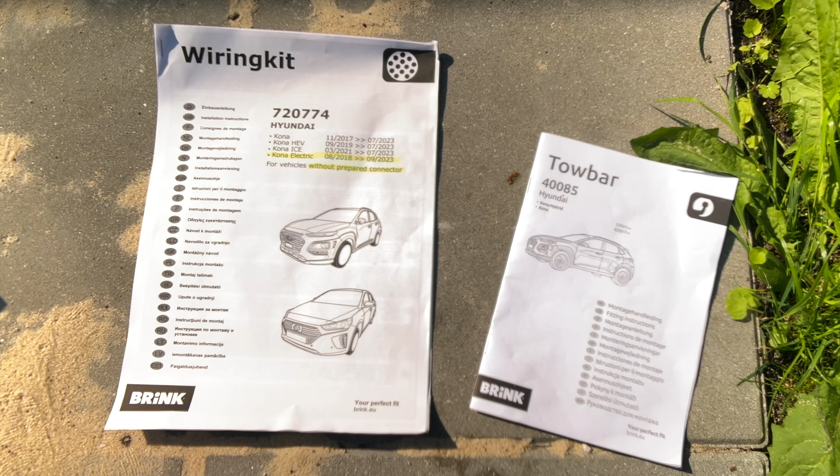In this video I'm going to show you how to install a tow bar and wiring kit on a Hyundai Kona. Okay, so we have to remove the rear bumper.

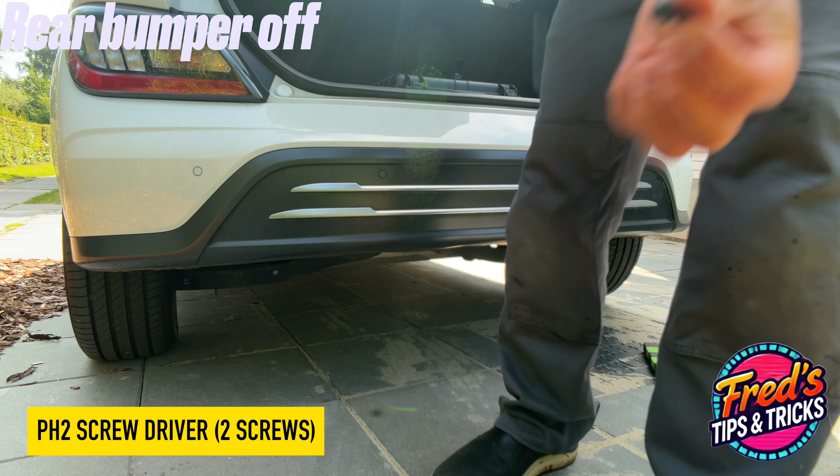Self-tapping screw, all of these in this one so I can keep track of all the bolts. So that should be 4 here, one up there. So just removing all of these 4.

So this is actually so tight that you can't really do it. Yeah, just barely did it.

So, and there should be 4 on the other side as well. These clips, this one here, and similar on the other side. I have one of these.

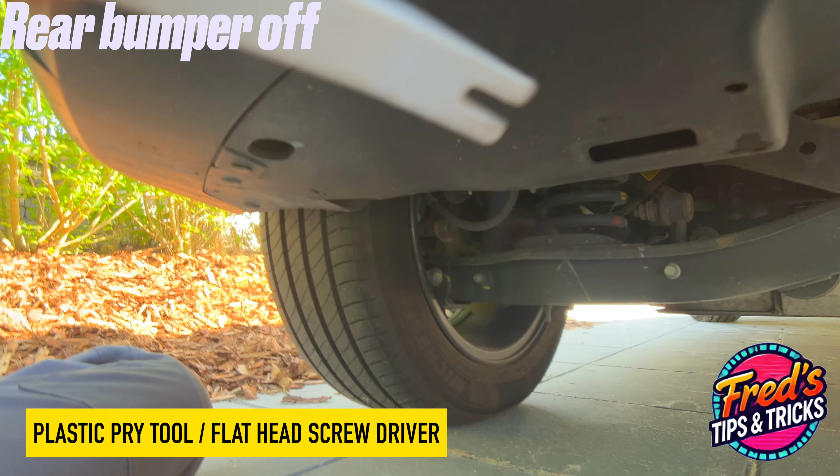You can just use a screwdriver, but when I'm using this one, I think it's more gentle. So, putting it in between the 2 plastics. Not above both, but like this, pushing in, and then taking it like this. Loosened.

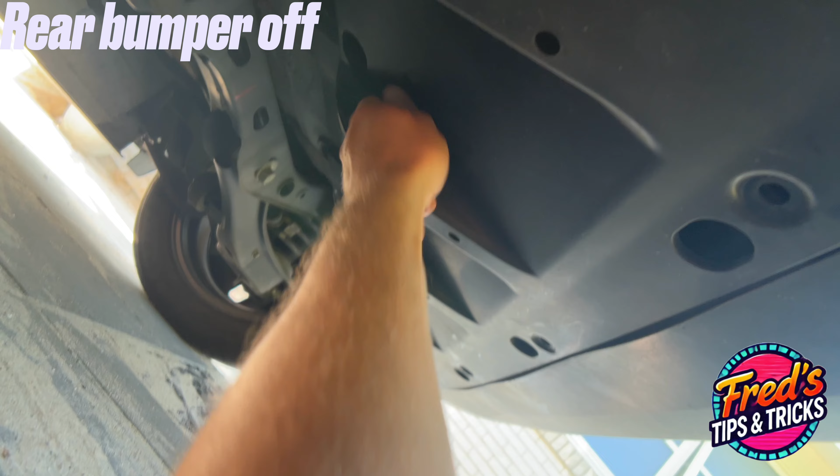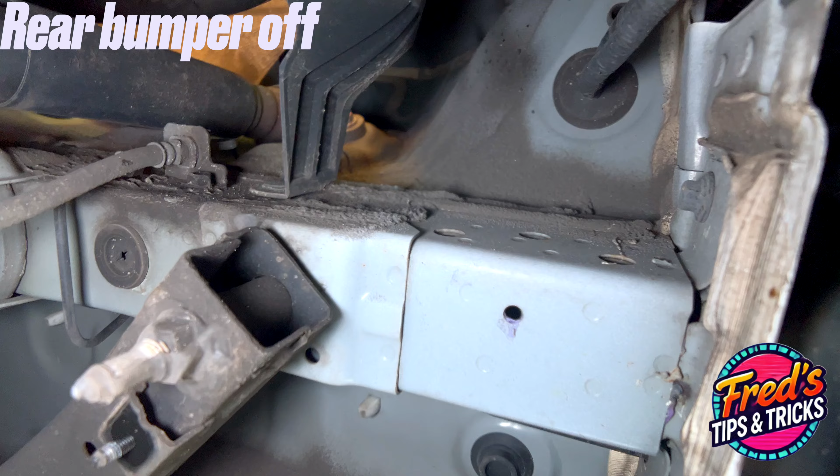That was 4 nuts, 10mm, and 2 down there. But you have to remove these 2 Phillips screws. Then you had a lot of clips, where I showed you, and now I have access to these 3 points, the ones you have to connect to these plates for the tow bar.

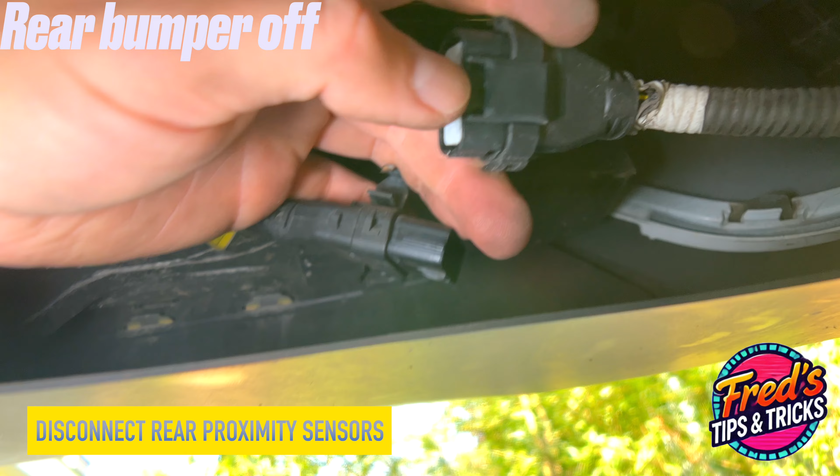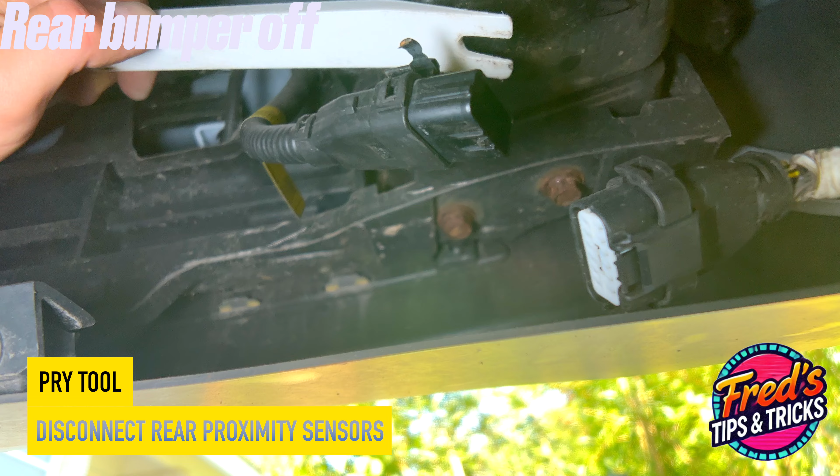This one here we have to remove. I started clicking this one in here with my fingernail, and then I could take this away from this, and this was sitting in here. Putting it in here and then just gently doing like this while wiggling. So take this one off, and same on the other side.

Yeah, like that. Nice. Okay, so I pushed down in this direction while pulling. That's so cool. So now that's loose.

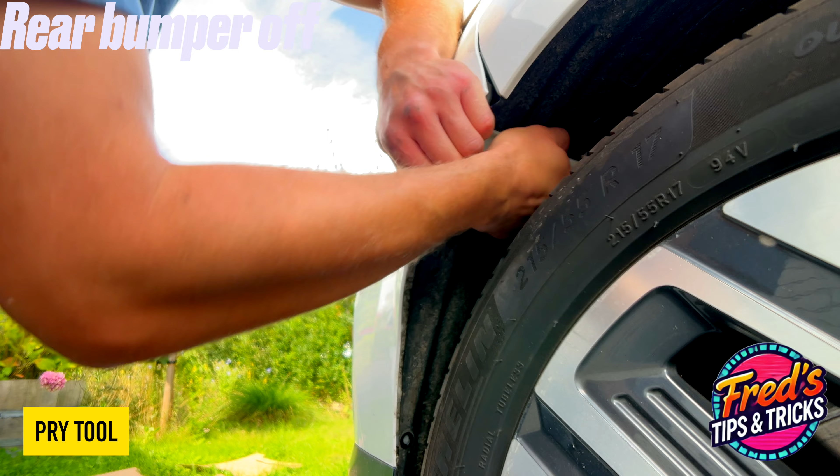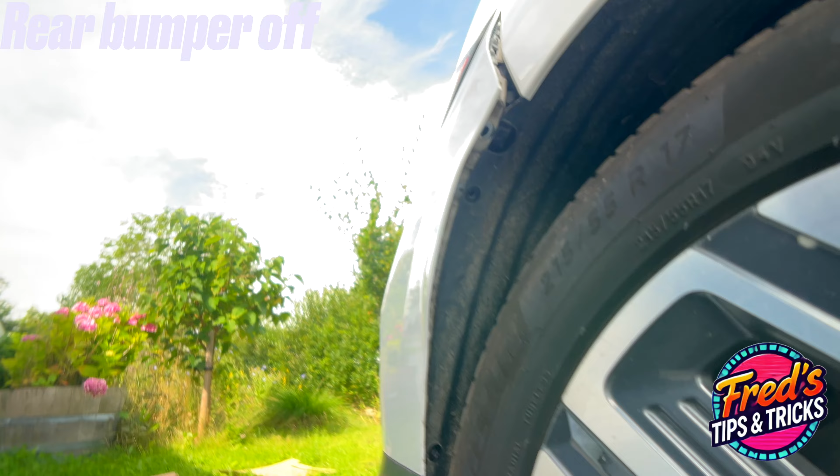Have to pull quite hard, but yeah, that's how you do it. Nothing broke and stuff like that. So nice. And now it should be coming off, I think. I'm having something down here - if I drop it, just wiggle it like this.

Yeah, now it's loose on this side. I'm just wiggling while pulling back on the car and the panels here and lifting. I have to pull this direction up here. That was the sound I wanted. It's loosening now, I'm just trying.

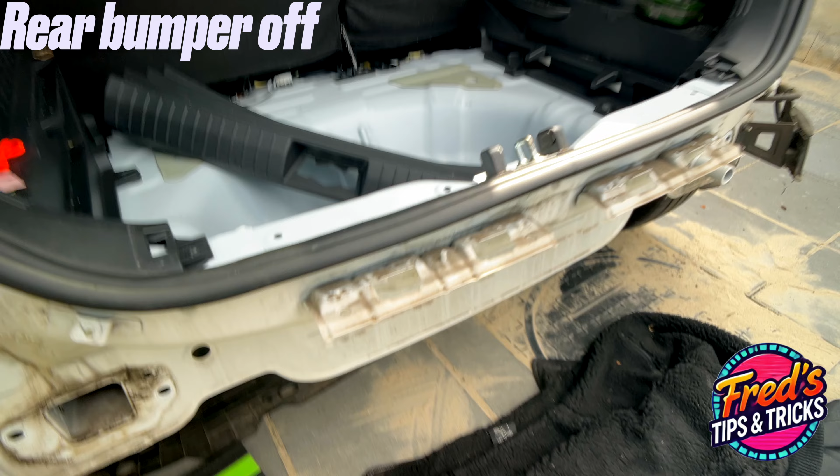Oh, and it all went off. That's so awesome, I got it. It was these 4 that I had to pull out.

That's 2 plates. This kind should be the same, I think. It looks like it's the same. These have to be torqued at 75 Newton meters.

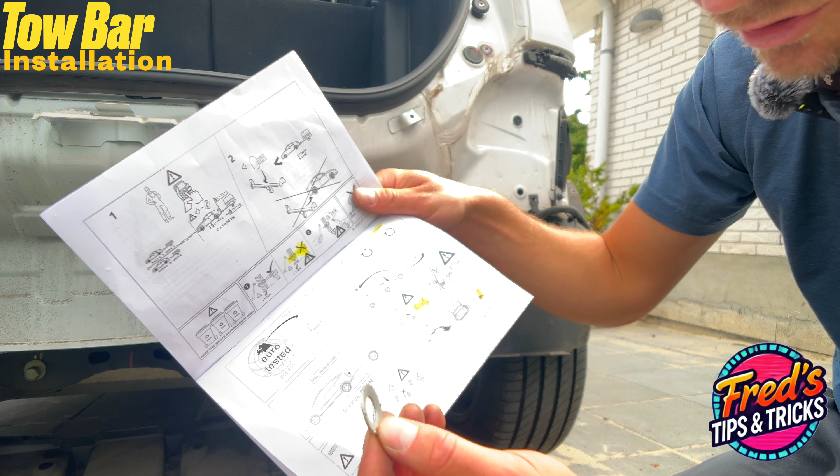So I'm putting it up here like this, and there. Then I'm doing like this, there, and then bolts through here. These ones should be away from the bolts, with these points here, making sense going into the chassis and locking itself. So that's what I'm doing, and I'll prepare them all so I don't forget one.

I'm taking the outer one, just checking if it says like right side, left side. It doesn't. So putting this through, and I know it's the first hole - it's through, and I'm taking this hole because it's the easiest for me to control.

I'm not going all the way in because I have to get the other ones. Remember the spacer - remember not to drop it. Perfect. And not hand tightening it all the way. Now it should be placed right. Yeah, that's perfect.

And I'm waiting with the torque wrench because I just have to see - sometimes I do something wrong and then I have to do it all over again, so I'm just waiting, making it wiggle like that.

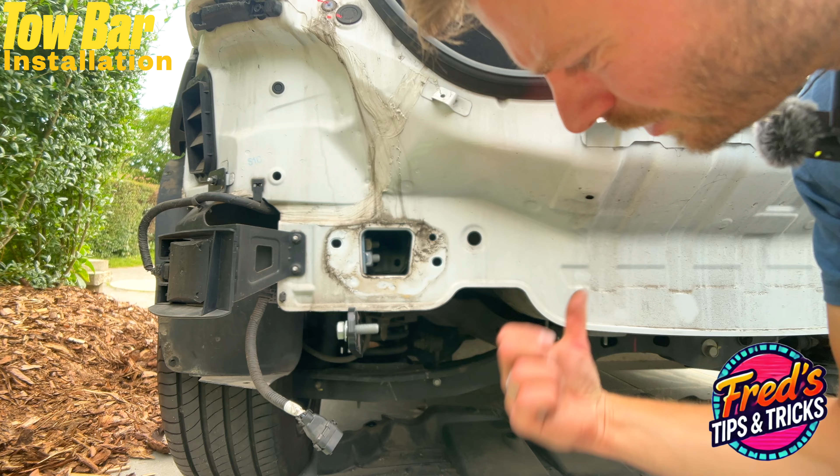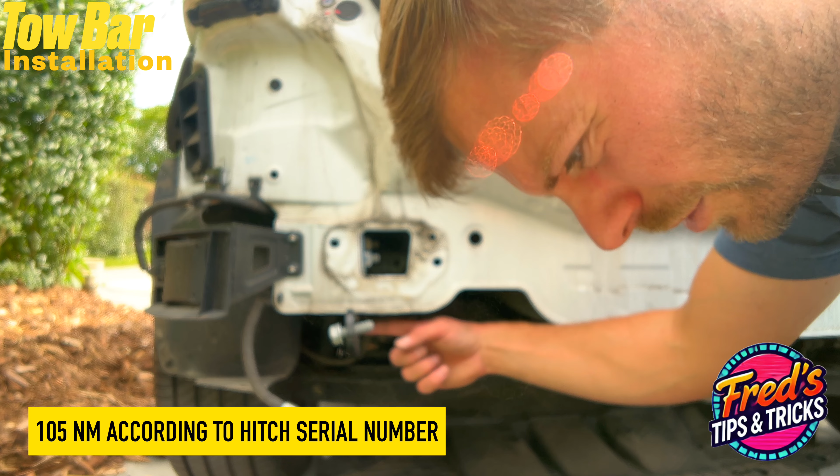They have to have it this way in, and actually without a spacer, this one. And they should have 105 Newton meters of torque, this one, and the complementary one over there, and also these ones - they should also have Newton meters, so be aware of that. And you have to torque it up again after 1,000 kilometers of driving.

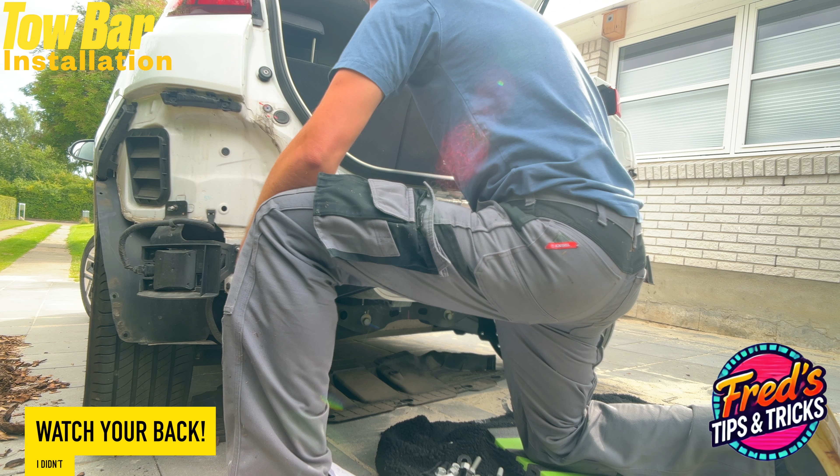I'm just gonna turn it around like this. That was very bad for my back, I could feel, but I have to do it like that. So cool, just checking. Just goes down, and yeah, I know it.

19 maybe? Exactly, okay. Just not going all the way. Nice.

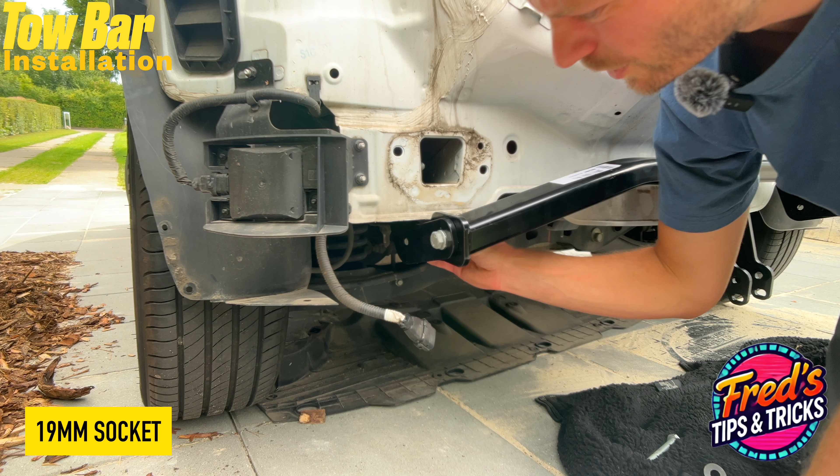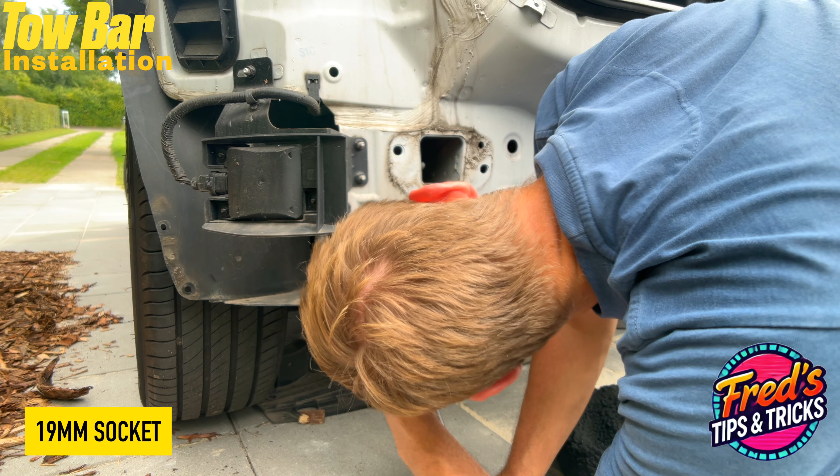And in here, and then just with a nut. I'm just trying out if I can get up here. Yeah, I can, that's awesome. Okay, from the inside and out. Okay, cool.

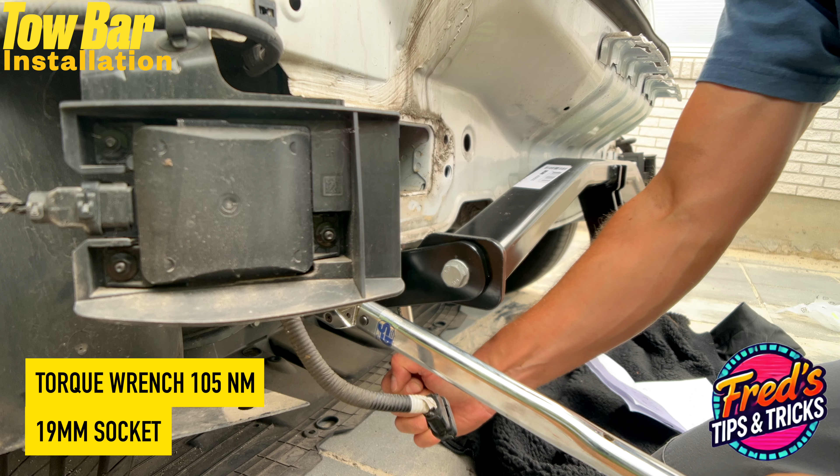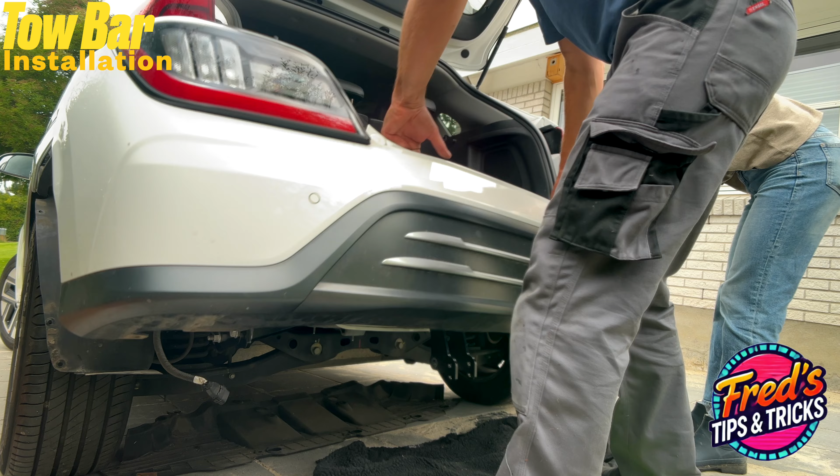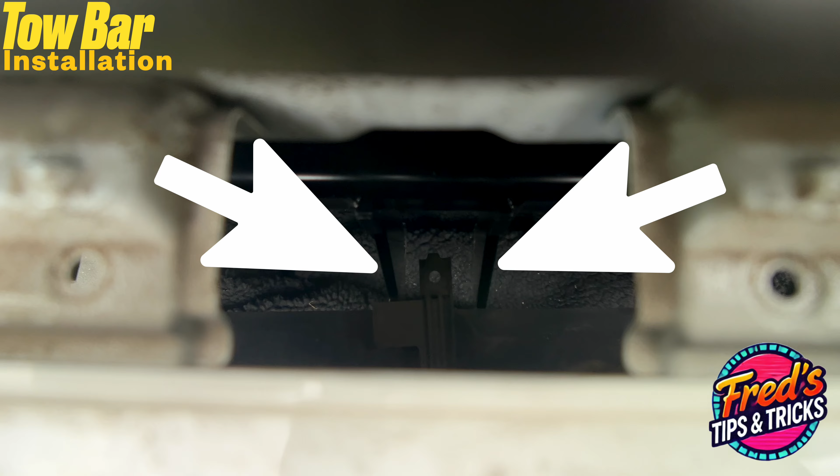So what I did here was use two black ones as the hitch, and you obviously have to cut it to get it all the way in. So that's why I aligned it here, to just be able to see where I should cut it. I'm trying to do that now with just a normal knife. I just removed this, and when I bought the car and the hitch, he gave me one of these, like a sketch for how much to cut. So I just tried to mimic that, and now I'm just using the knife.

Generally, when you're cutting towards yourself, that's a bad idea. Here I had a very short blade, and I used a lot of force, pushing into the plastic so it wouldn't slip as easily, and I was tensioning up my arm, so when it slips, it does that in a second - you can see it doesn't go that far.

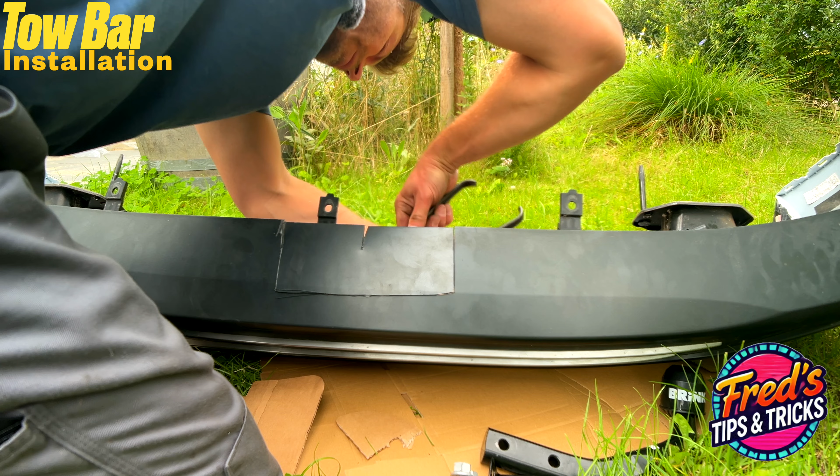Nice, yes. And it says up here they cut it, and they did a lot of these things because they only sold used Hyundai Konas, so I'm trusting this.

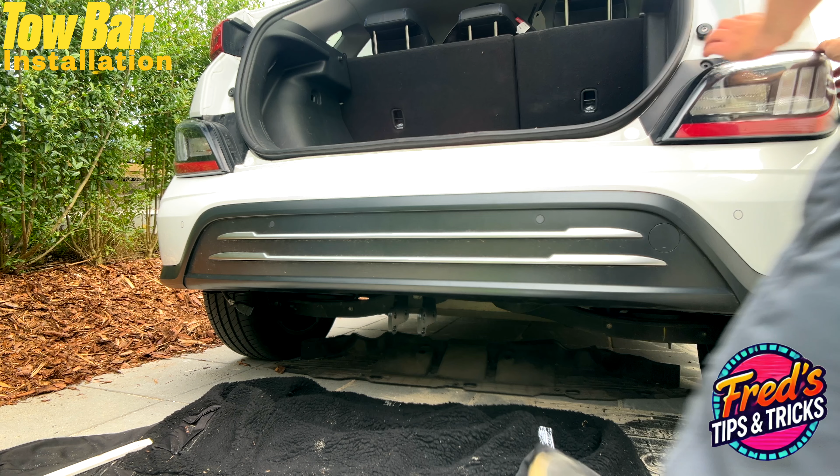And you can see here, I just have my lovely assistant helping me with getting this on. And now it looks like this.

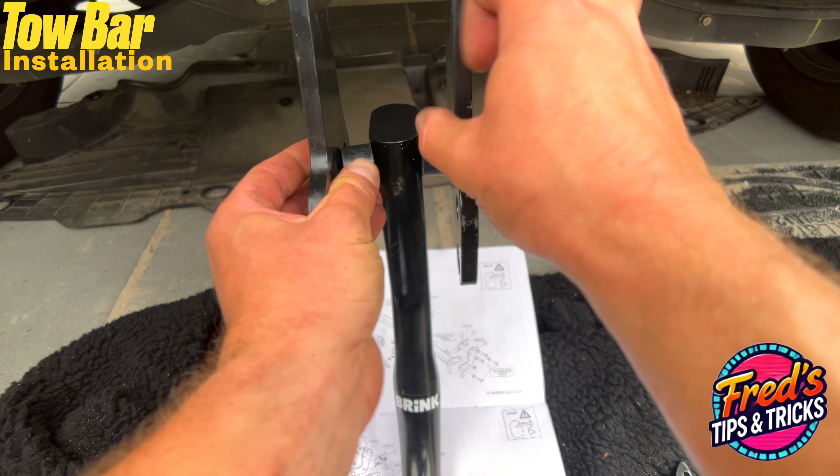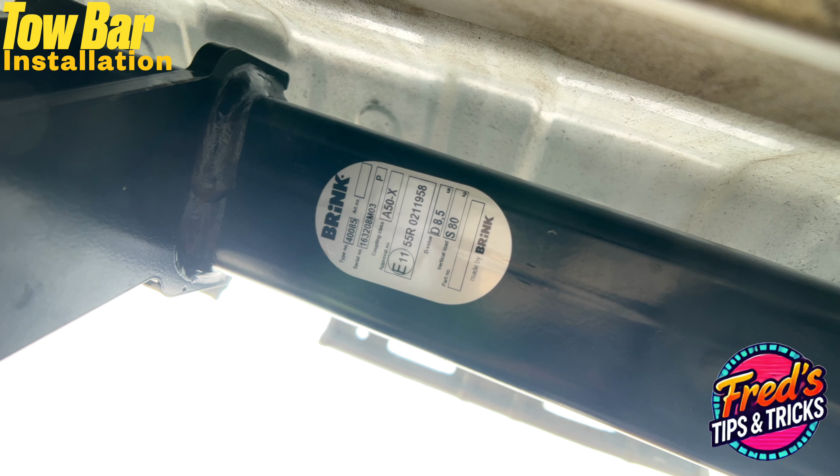The serial number is right below here. Mine ends with a P, and that's only 105 Newton meters of torque. I'm just gonna torque this at 105 now.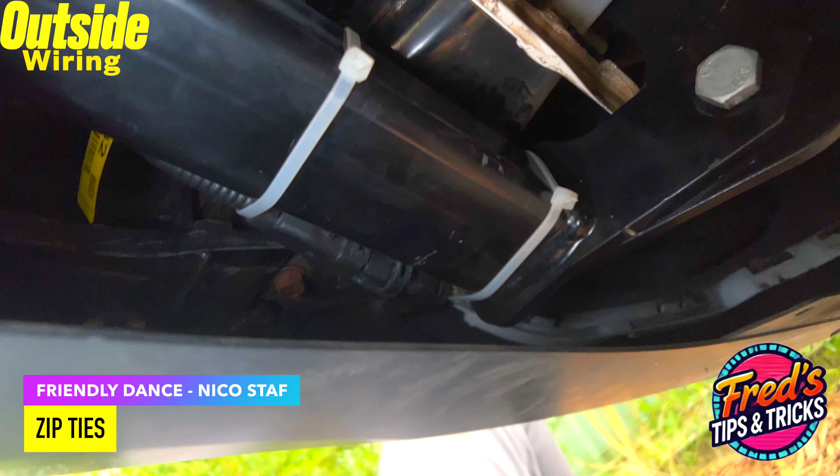The connectors I had to reinstall with cable ties because the space is occupied by the beam now - this beam. So yeah, that's just how I fitted it.

So reconnect it first and then fit it. Cool, there you go - the other one.

Can you see it? The great thing with these plastic things is that they don't scratch as much.

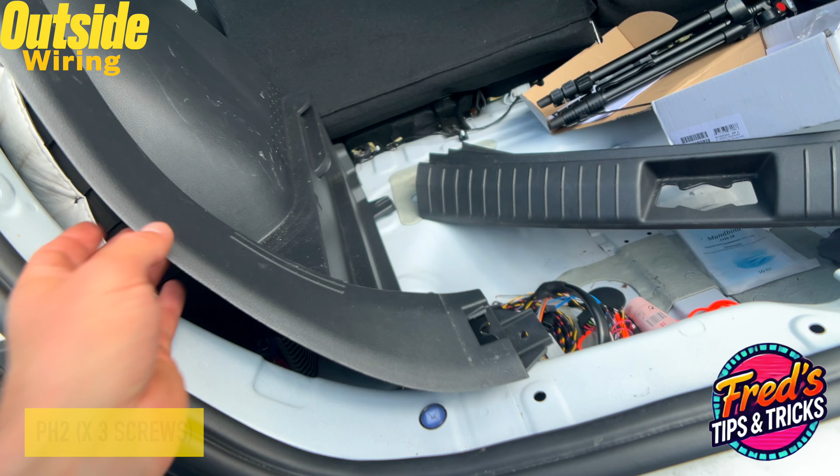Four clips, 1, 2, 3, 4, and these 2 clips as well. So I have to remove this one. 3 screws, and you just take it out.

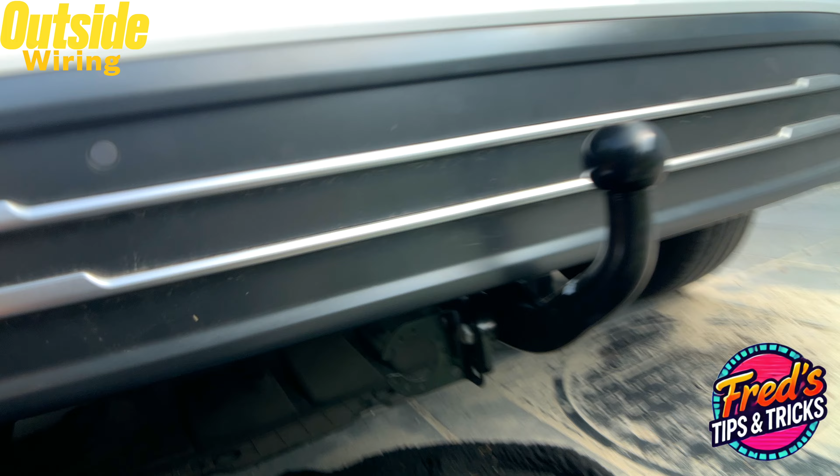Then right here you have this rubber ring seal. You have to get the cable down there from upstairs, from the top, and then there's enough wiring for you to work on, and then you have to mount it.

There's numbers on the connector itself that has to correspond to the colors on this particular wiring kit - to a blue and black.

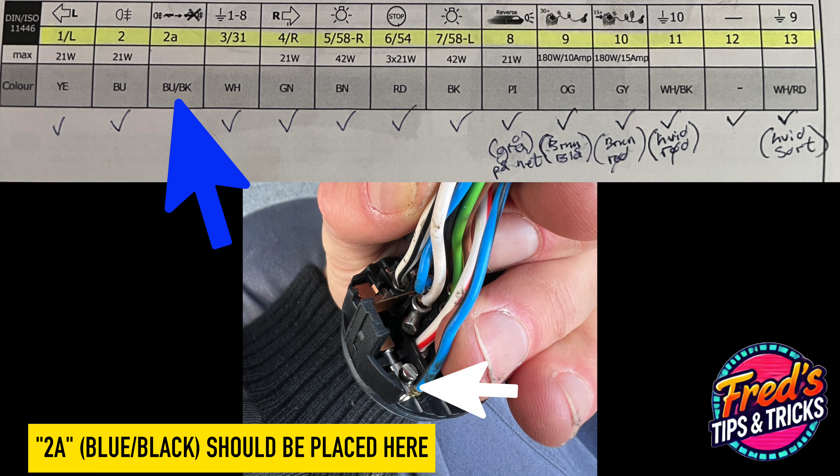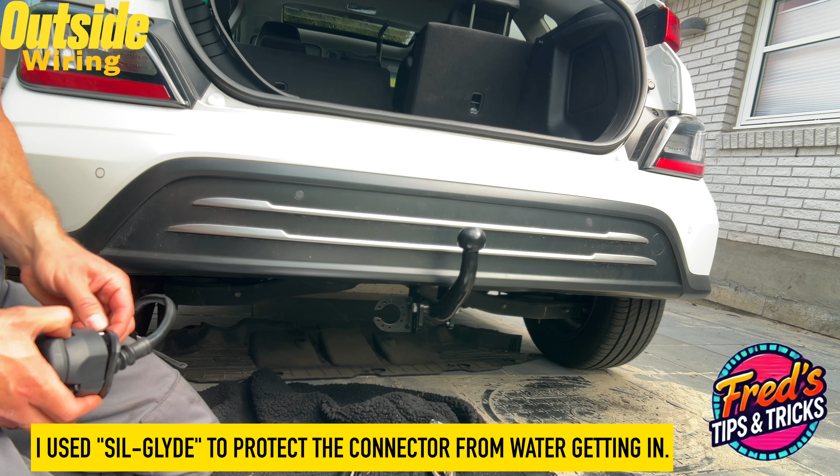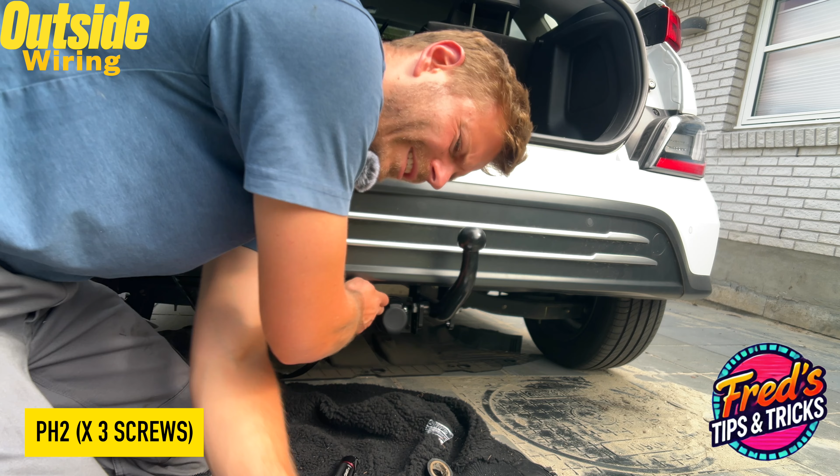Now I have a lot of spare, but I'm going to zip tie it up on the beam. It goes from back here up on the beam. Zip tie, zip tie, zip tie.

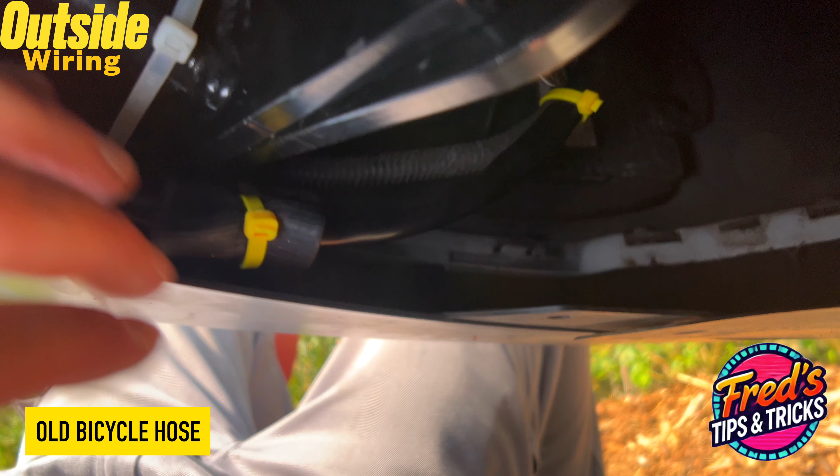And because I can't really zip tie it here, I've done something so it won't rub against this, because over a lot of kilometers, this is gonna tear and wear on your cable. On it up there and up there.

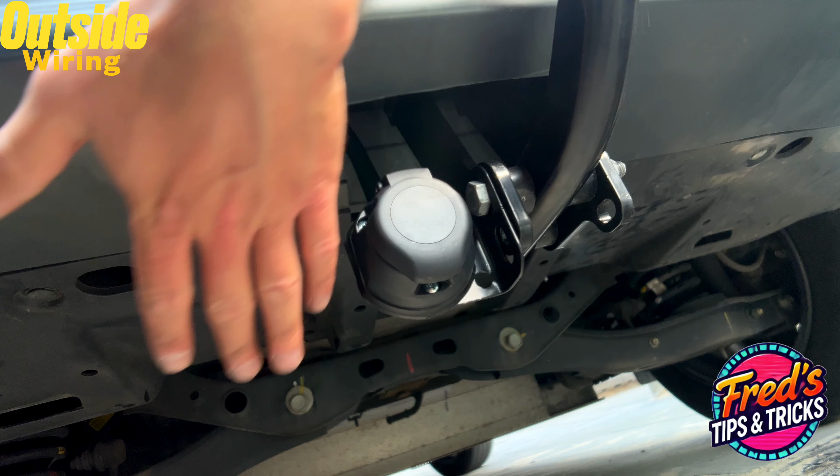When we install this plating, you also have to cut this to make it fit, but it's quite easy. Put some silicone here to seal it off, as it says in the manual.

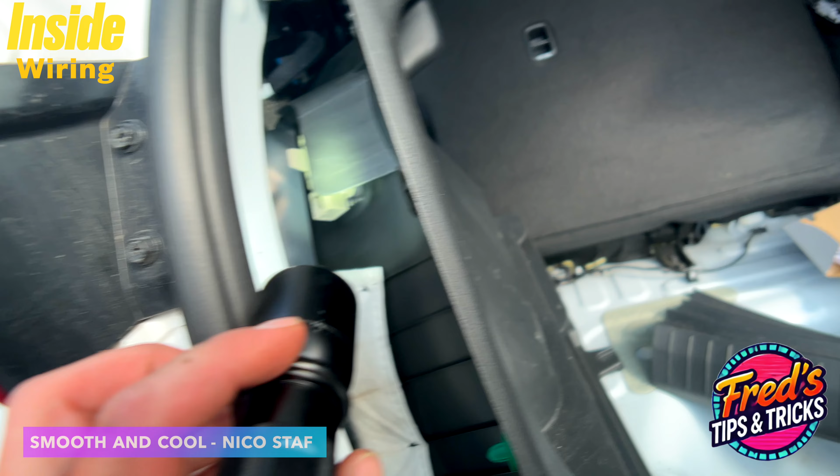And I just took, by the way, this connector off for the lighting. It's right down there, so I could get this further out. Down there you can barely see where the wiring is exposed.

I took it way too far down, so remove some of the tape that it says and do it in the middle like this instead. I'm just gonna give it some electrical tape to isolate it from the other wiring. I just put on the ignition.

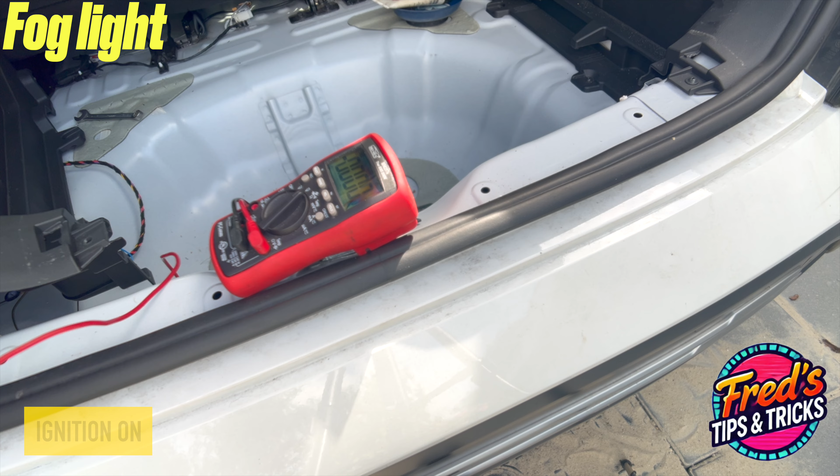Now I'm taking this one down in the small groove. Remember to have your ground. There's no fog light on now, so 0 volts.

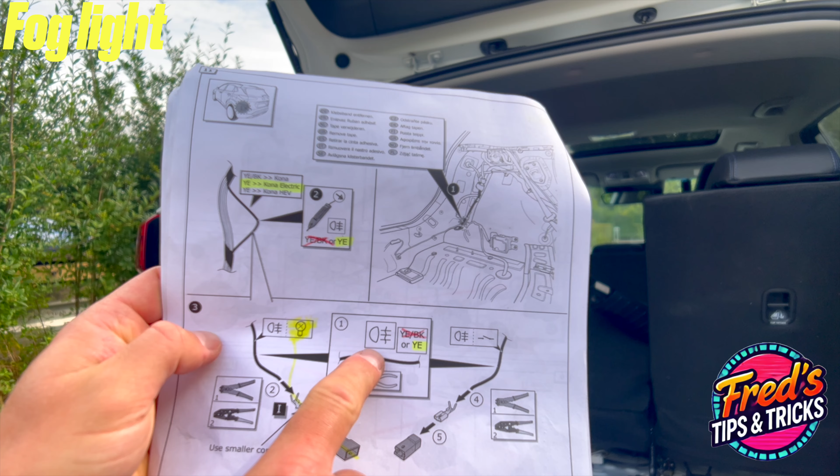Now I'm just gonna go in and turn it on. Here we have 12 volts. Turn off the ignition - we're cutting it here to put on the connectors. This is the fog light symbol, obviously.

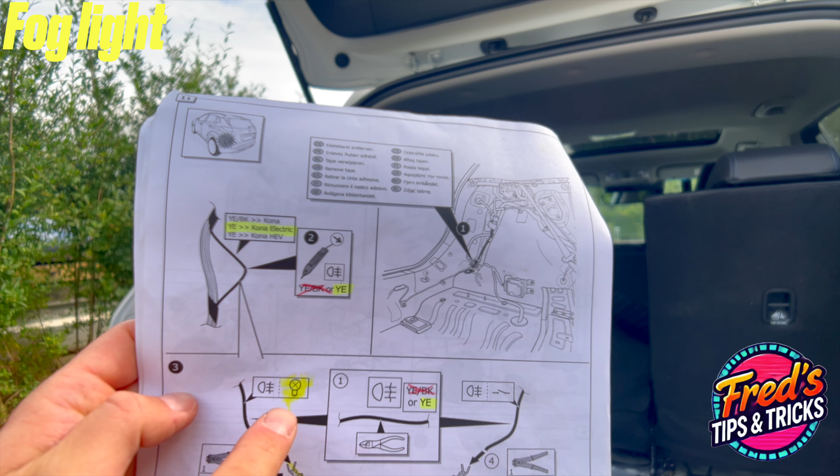We have the yellow one, which is the one I just cut and measured on. This is the light bulb, and this is the switch for the light bulb. So you should think of this as being the light bulb itself.

This one, so that has to have a male connector with the big connector, and the other side should have a female connector with the smaller connector.

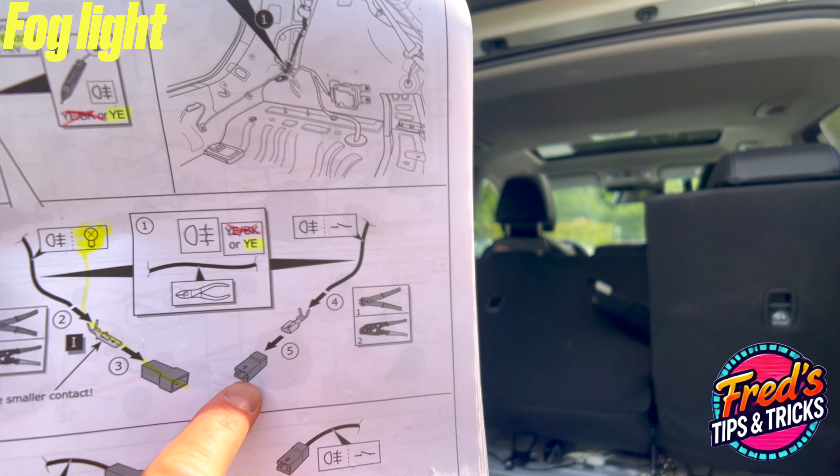This is very important. The reason they are saying use smaller contact is that you have 2 contacts here. One of them is bigger - this one is bigger. This is for 2 wires that are going to the fuse box.

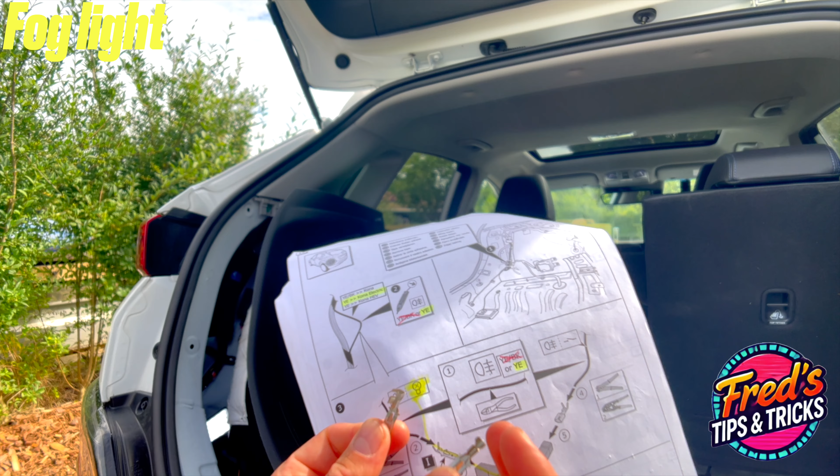This one you want to use. This is for a single wire. So keep that in mind to use here.

And at first you're gonna uninsulate the wiring. I had to take the whole bundle out. I used my pry tool here to just go in between the clip that holds it, like down here, and then just force it out.

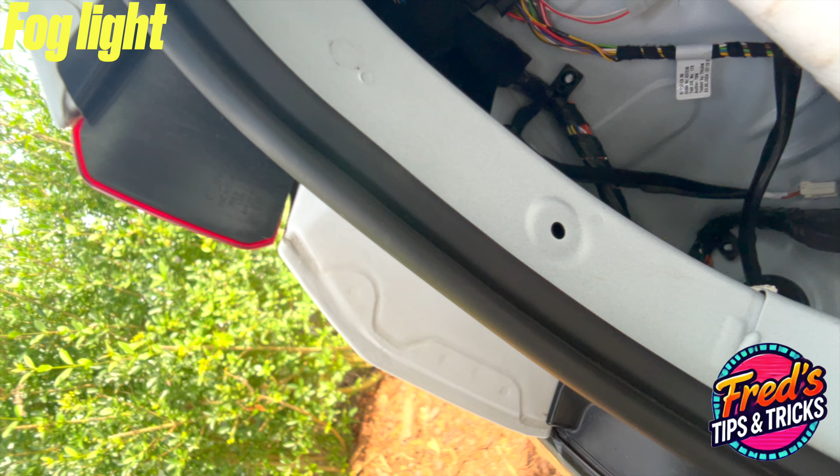I needed that because my crimping tool, my isolation, is all the way down here. Be aware not to cut anything else with this end when you're unisolating. I had to use the 0.75.

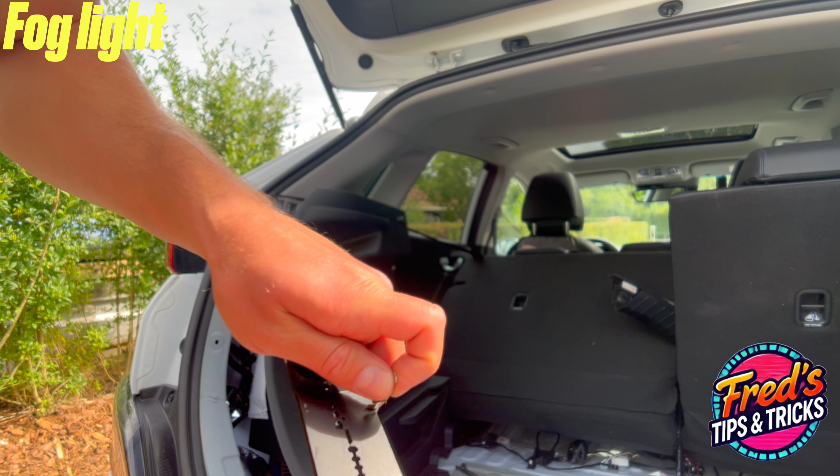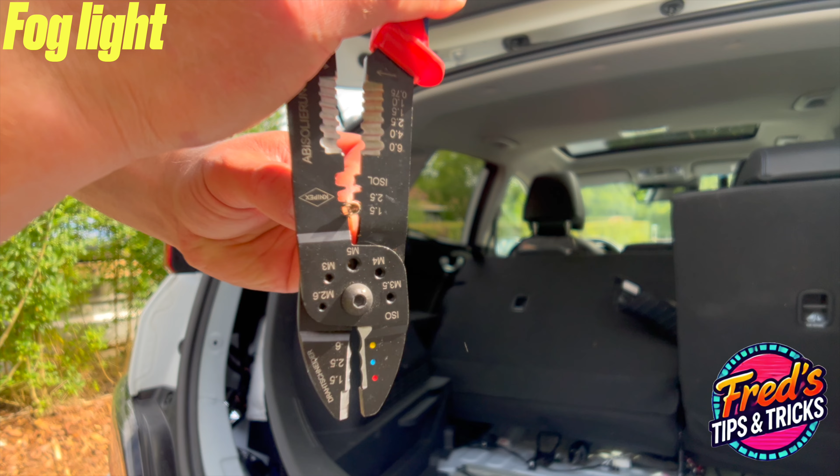Put this right here like this, so it gets the isolating to touch and the other one around it like that. When you're crimping it, there's 2 sizes, a big one and a small one. You need the big one for that, and the small one around the wiring, so you get it nice and tight.

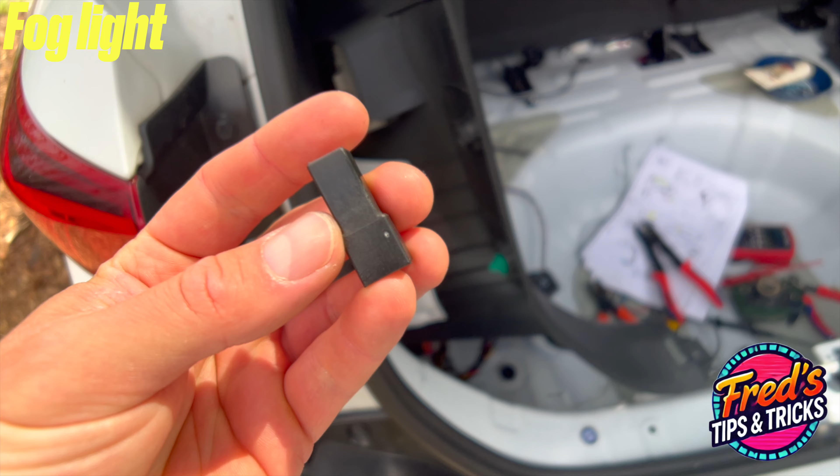Remember to turn off the ignition before this, because if your pliers get in contact with the chassis, it may blow the fuse. So now I got it, and I'm just taking this one, and you can see here that it's a male one.

So I'm just taking this one, and it can only fit one way. Now I got it in, and it has to click. Now it's time for the female connector on the other side.

I just saw that this one is the middle size, 2.5, and the big one. I didn't get the wiring in before I clamped it down, so I took a pick, put it in, and gently wiggled it. These break very easily, so you only get 2 chances with these.

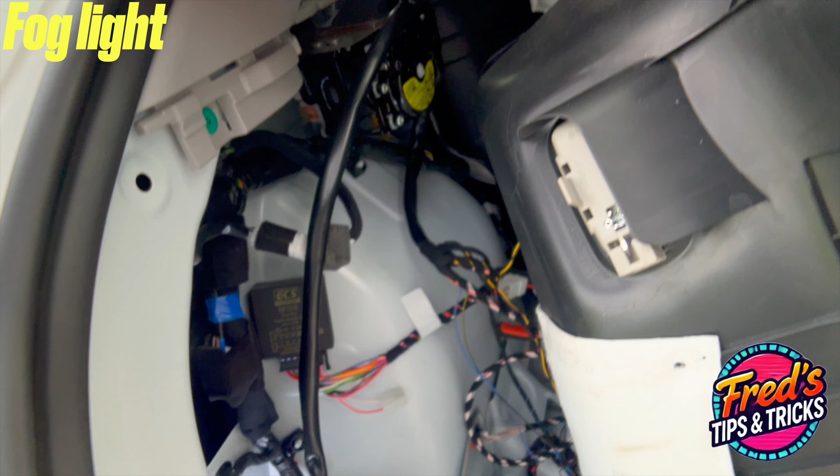I've got this clamped on, can pull it. I just put this wiring up here so it didn't bother me, and that was actually the trick, to get this big plier in there like this or something. Yeah, and it clicked.

Those are a male to a female. I'm just checking it to make sure.

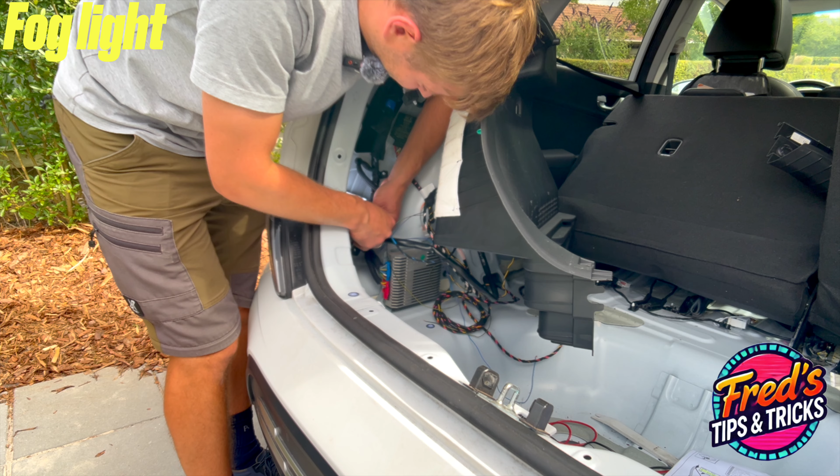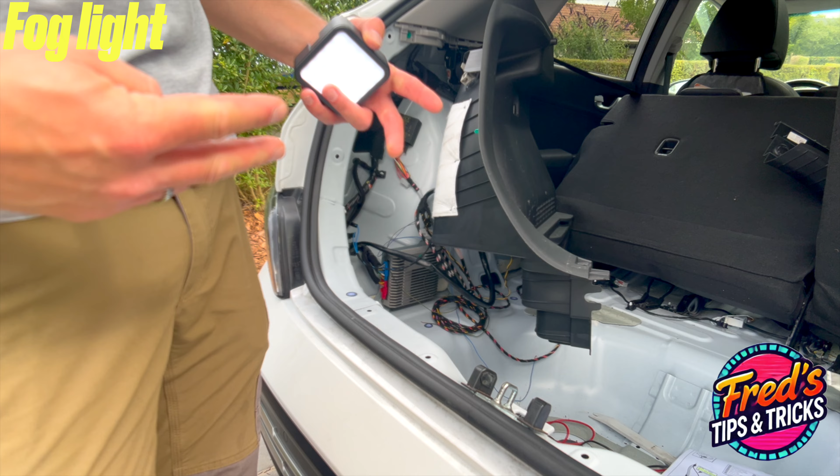With these connectors, when you're putting them on, they don't feel nice, but they are on. It's not like something's wrong. This one here is the grounding, which I put on here. I just took off this nut and put both of them on there.

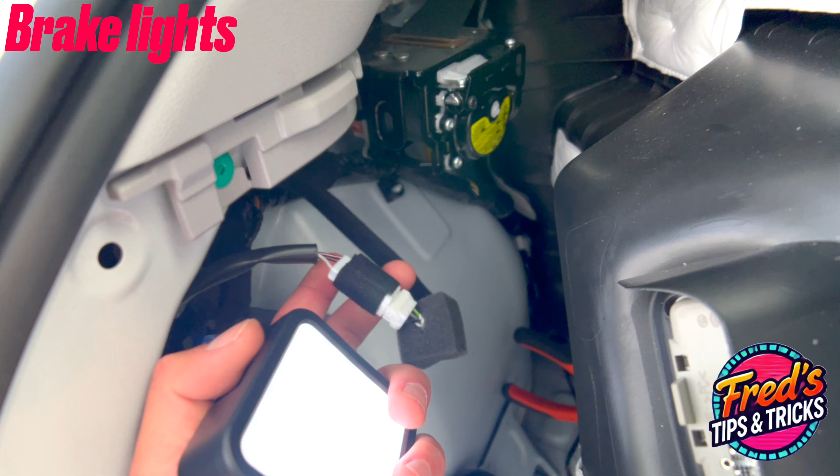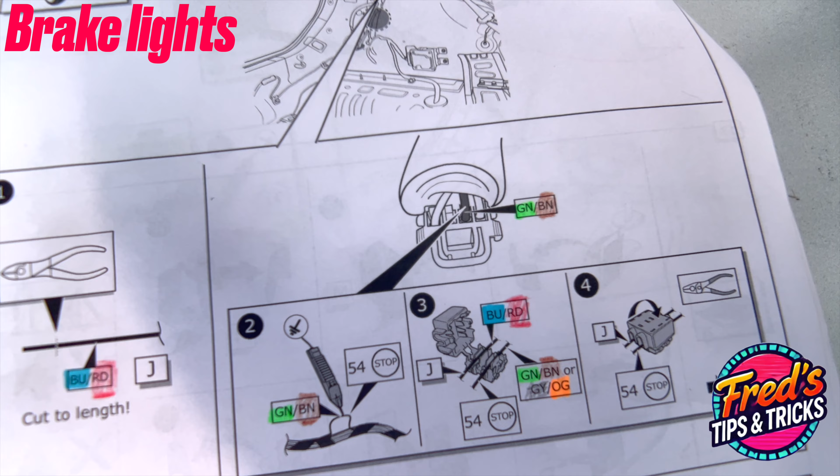On the drawing it says green and brown, or gray and orange. This connector is this connector, and it makes sense because it goes to the rear tail light right here, just like on this connector. The button is on the lower side at the bottom, and it's here. Number 2 from the right is gray and orange.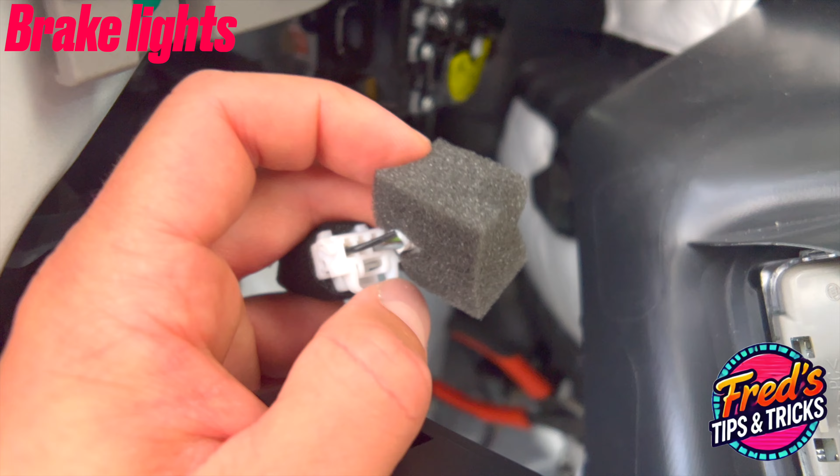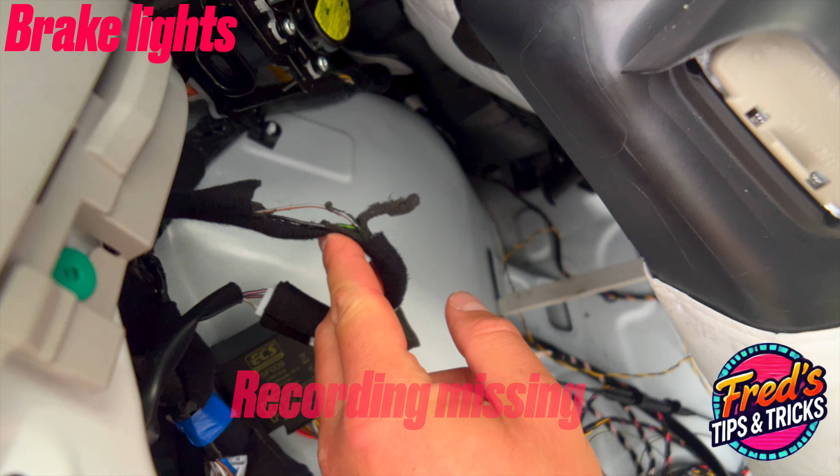So I'm just tapping in and seeing if that's correct. It should be at 12 when I get the brake lights. Now the brake lights are on, off, on, off. I just pulled off this tape here and found the wire right there. You just find the one that is gray and orange. Mine is there, and just plug it into here with one of these connectors.

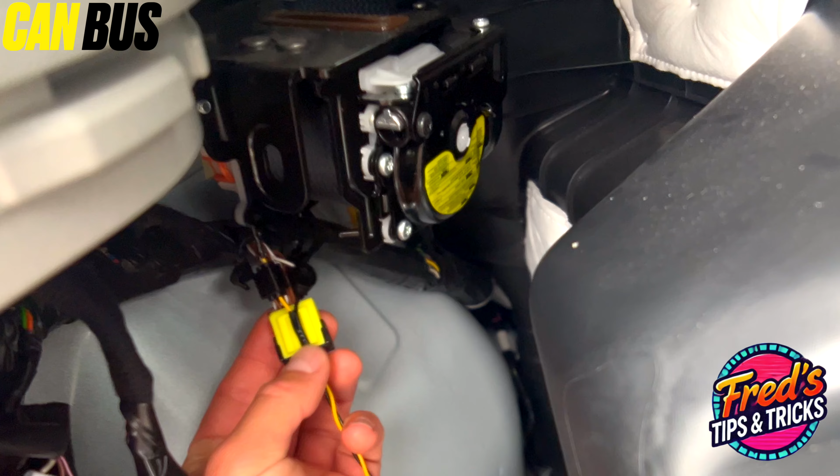This is for the CAN bus system. You need to take off the battery negative terminal and be sure they are not connected while you're doing this. This is the connector. Look for these grooves down here. That's those, the yellow ones.

Then you need to tap into number 2, which is a white one, and number 9, which is a brown one. Black to white and brown to yellow. And then we have this one, an extra that you don't have to use.

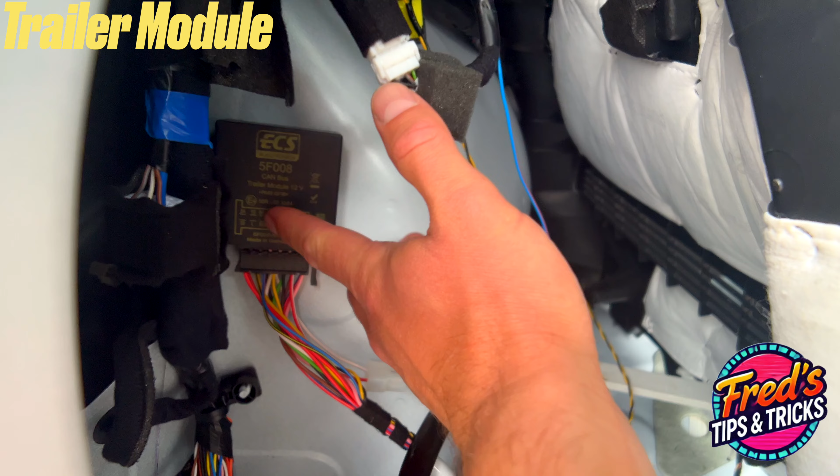Then we have the CAN bus trailer module here. You have to put in the connector there. This is for something else that you don't need, so use one of the sticky pads to put it on here. And finally we have this one.

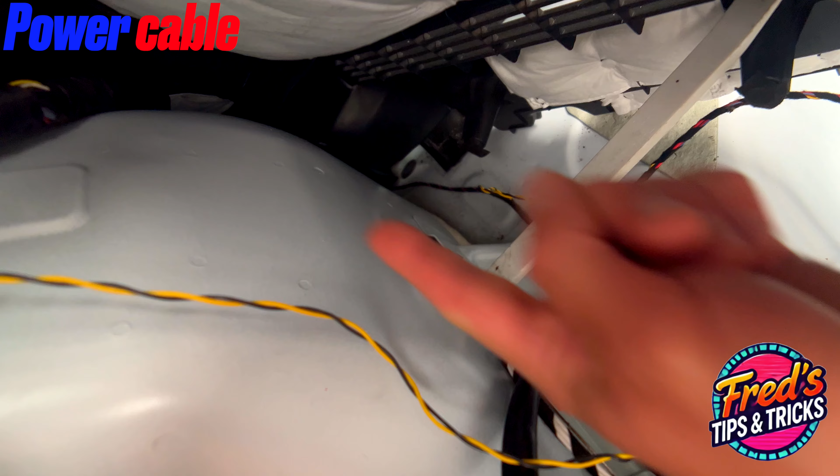It needs to go down here and follow the car on this side. I took this rubber gasket, or whatever you can call it, out. Then I fed it in through here from behind, obviously, until I could see it here. I took a pair of pliers, gently taking it out. Then I put it down here, all the way in, and fed it in here.

And then I was able to, with a pair of pliers, take it out here, and then I could just put it down here, taking the seal off again, the rubber gasket. Then I took the handle off, the handle for the bonnet.

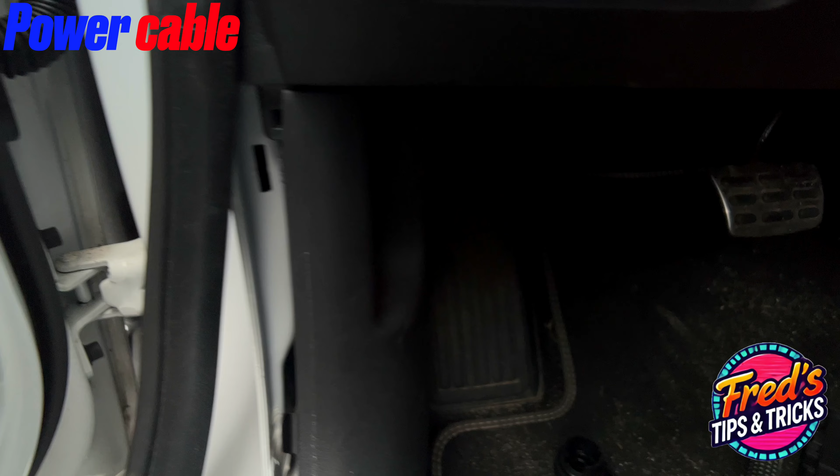The big one for these two, they have to be connected. It says it has to go from this side, and it's number 3 from the top and 7.

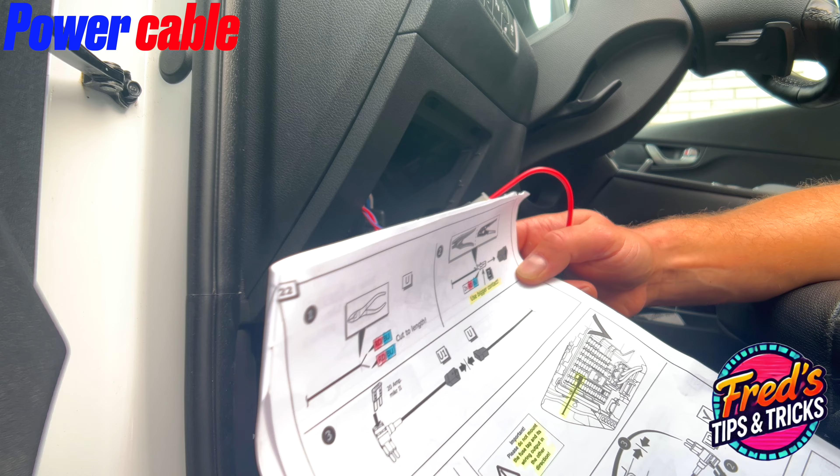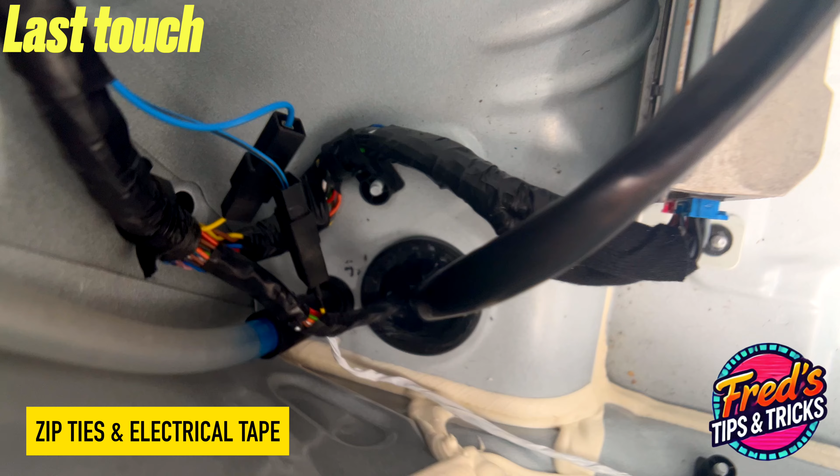I just put cable ties up so the whole thing isn't just dangling around, and hopefully it's gonna just close. This one I have to reinstall right here, and down here I just sealed it off with a silicone sealer, marine sealer. I gave it some electrical tape here, and up here some cable ties, so now I'm trying to close it up.